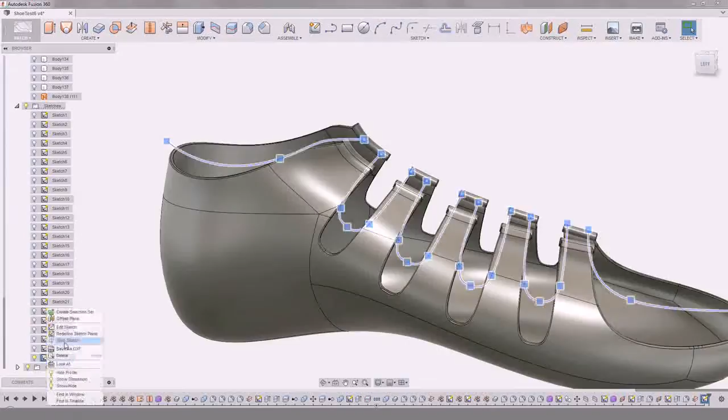So that's the first half, but since our shoe is not symmetric, we're going to copy this to the other side. We're just going to create another sketch and start going at it from the other direction, modifying our profile to match the second half.

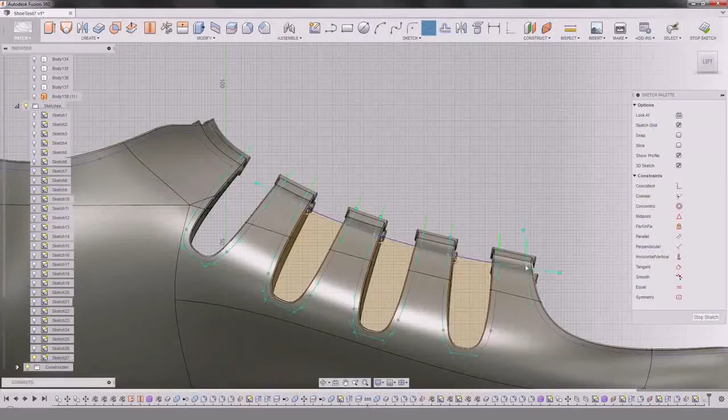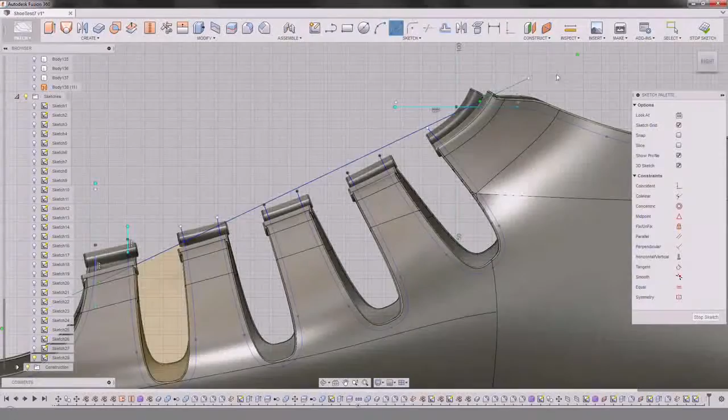We're going to extrude each half separately. Do the other side, do all the trims that I had on the other side on this side too. I didn't really do this side right because it doesn't quite match the other half, but oh well.

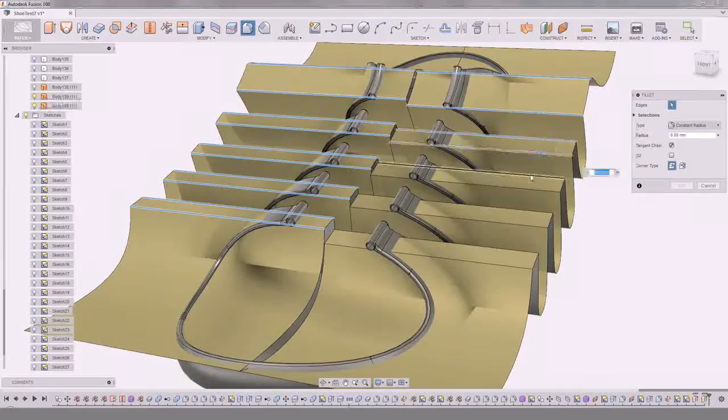I'm just going to add some fillets to the top edges of these surfaces. And now we're going to trim out the center section of our reference geometry and use that to trim out.

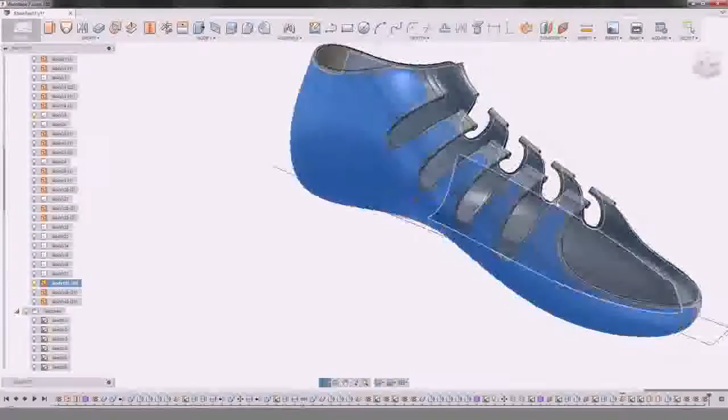So this is most of the way done, but what I want to do is merge and loft from one side of these to the other, so this is one surface. That way when I create the sweep that goes around here, it goes around the whole thing, not just half.

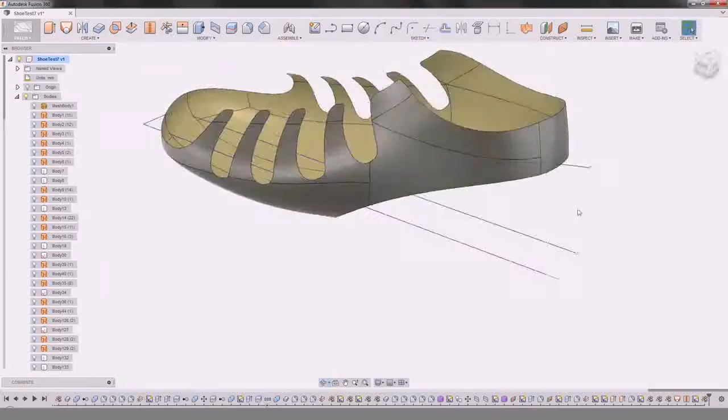There was some bad geometry at the bottom, so I just trimmed it off because I was lazy. Creating a plane along the path, sketching on that surface.

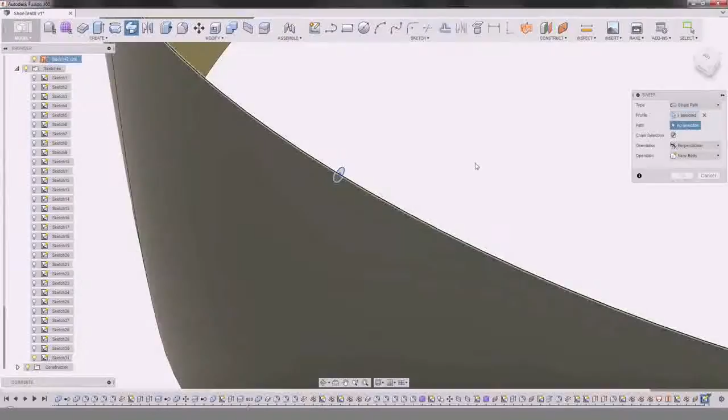Initially I was actually going to create real stitches and create a pattern along the path, but it ended up not quite liking it and crashing the computer, so I just said screw it and swept along the whole entire path.

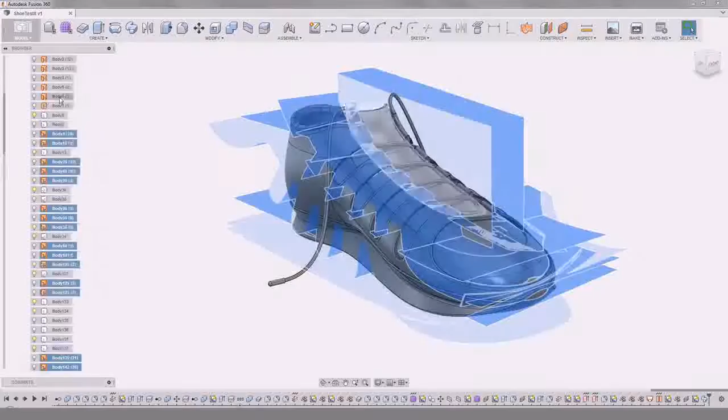And that's pretty much the end of the model. There's some other things we can do, which I'll show you in a minute here, but here's our entire thing. We're going to delete all of our reference geometry at the end, just so it makes a cleaner file.

I can add some materiality to it.

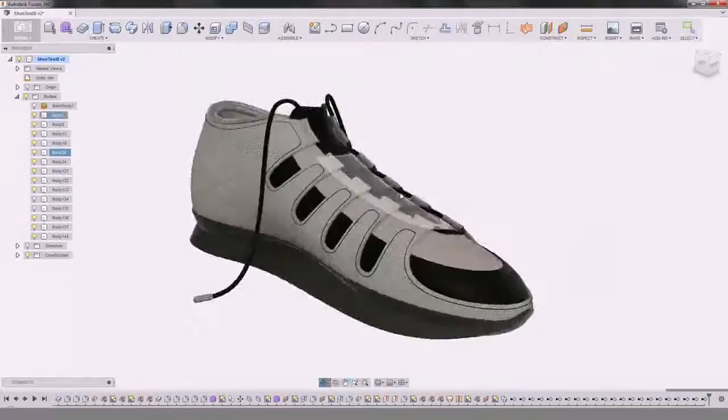And then if we want, we can go into render mode and render this guy in Fusion. I'm not a particular fan of the render quality of Fusion, but we can if we want to.

In a minute here I'll show you how to bring this guy into an external renderer, to get a little bit higher quality renders out of it.

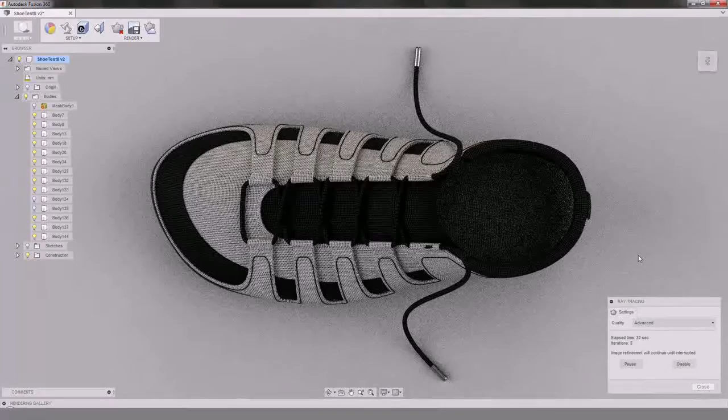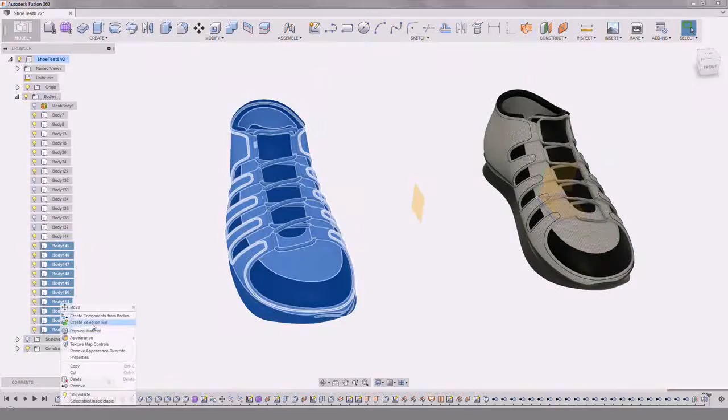And just really quick, I'm going to show you a couple things that you might want to do with this model. I'm just going to create an offset plane from the side view, and then you can create a mirror to the other side, so you can have a left and a right shoe. That's one thing you can do with it.

You can right click and export any of these bodies as an STL file. You can also export OBJ files from Fusion, but it's a little bit tricky.

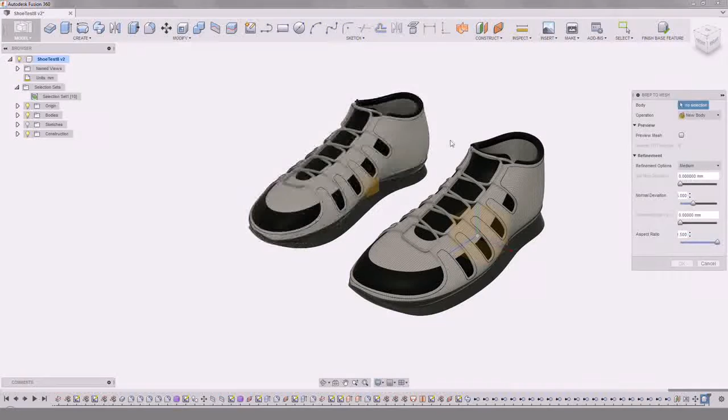You have to go into base feature and then convert the solid body into a mesh, and then the OBJ export option will be available to you.

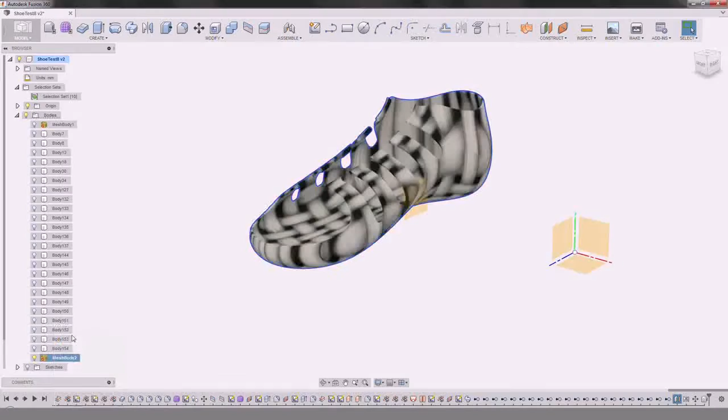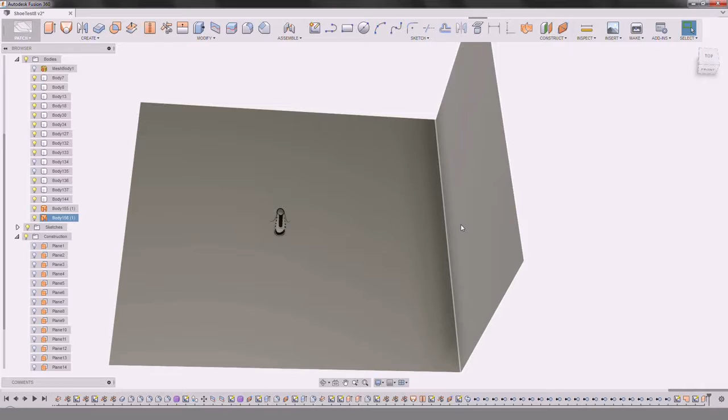You can also create a quick photo studio by creating a ground plane and then creating a back surface, then filleting that to become an infinity plane. Make sure this is curvature continuous, otherwise when you render you're going to see a curvature break.

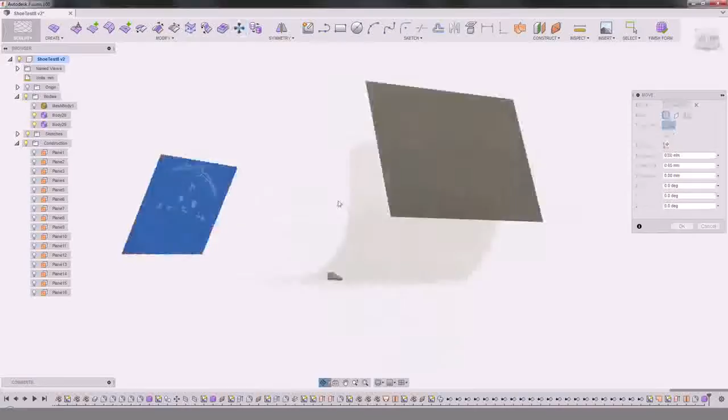Now I'm just creating a couple large planes to be used as softbox lights for the studio. Move these around into position wherever you want them. You can extend this guy out a little bit, and there we have our studio.

So now I'm going to export all of these bodies, and since I'm using Octane I need to export OBJ files, but I find the easiest way to do that is actually to export STL files through Meshmixer and use Meshmixer to create OBJ files.

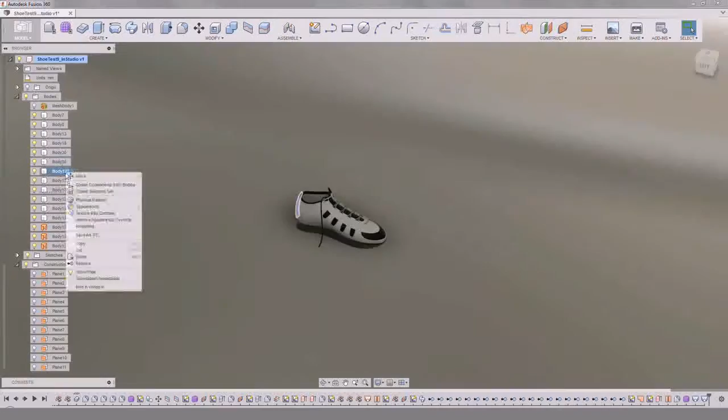If you want to export a solid or surface file, you can just export a SAT or a step file very easily. You can also, if you have programs like 3D Studio Max, bring in the entire scene into that with just one file, rather than what I'm doing here, which is creating each individual file for each part.

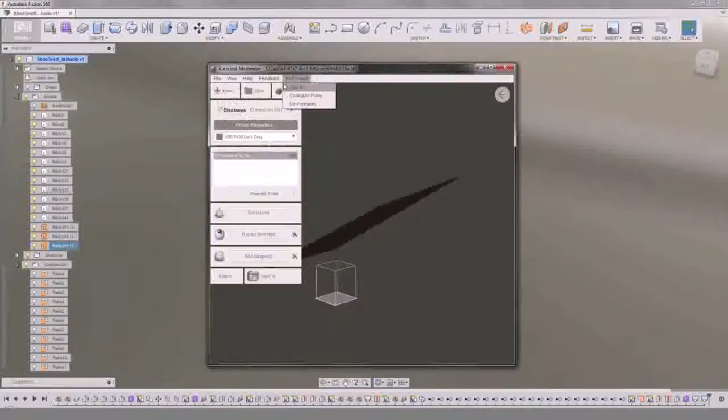So that's all of our parts, and now we're just going to bring these guys into Octane. Just going to link these guys up into a single scene, and after we put some ugly textures on there, we have our final shoe.